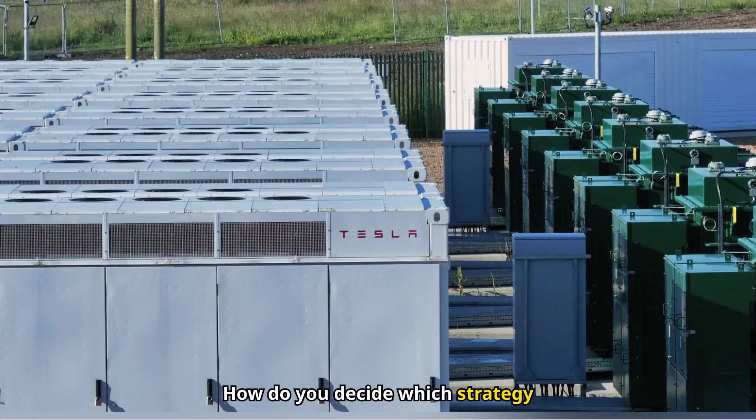AC and DC coupling offers different advantages depending on the type of plant and its environment. How do you decide which strategy is best for your solar or hybrid project? Today we will look at specific cases including new construction, retrofits, microgrids, and regions with grid saturation. Stay to find out which strategy can maximize the efficiency and profitability of your project.

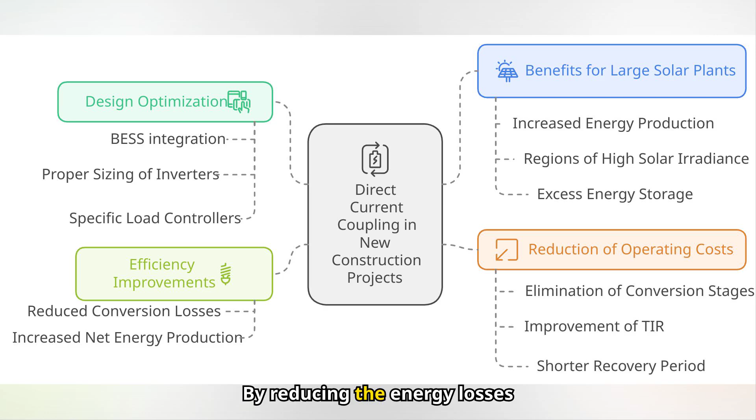DC coupling is a highly efficient solution for solar power projects designed from scratch, as it allows the infrastructure to be optimized from the initial phase. By reducing the energy losses associated with direct current DC to alternating current AC conversions, this approach significantly improves overall system efficiency in new projects, such as large capacity PV plants, greater than 50 megawatts.

DC coupling eliminates the need for multiple conversions, allowing power to flow directly from the solar panels to the storage systems. This results in higher energy efficiency and lower losses during the generation and storage process. This system is especially beneficial in regions with high solar irradiance, such as Andalusia or northern Chile, where energy generation can be maximized and losses minimized. These locations allow optimizing both production and storage, increasing the plant's total yield.

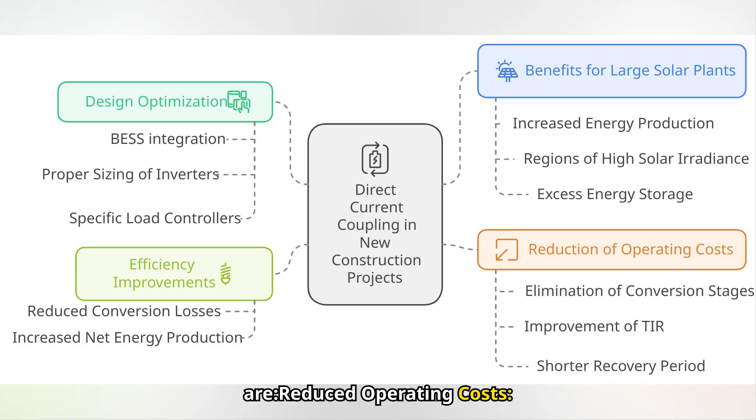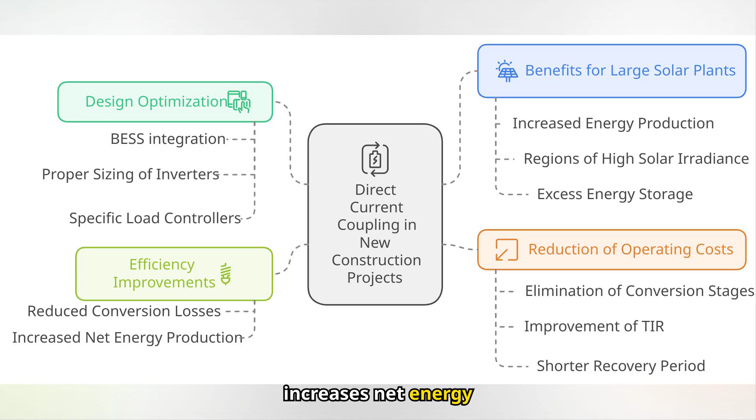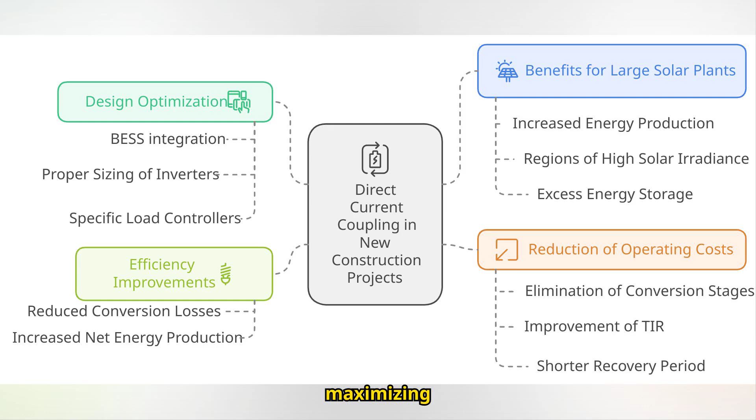The technical and economic benefits are reduced operating costs. Fewer conversions means less equipment, reducing maintenance and operating costs. Increased return on investment, IRR: maximizing energy efficiency increases net energy available for sale, improving revenues. Shorter payback period: increased efficiency and reduced costs allow the investment to be recovered in a shorter period of time. In short, DC coupling is a strategic option for new projects, maximizing efficiency, reducing costs, and accelerating profitability from the start.

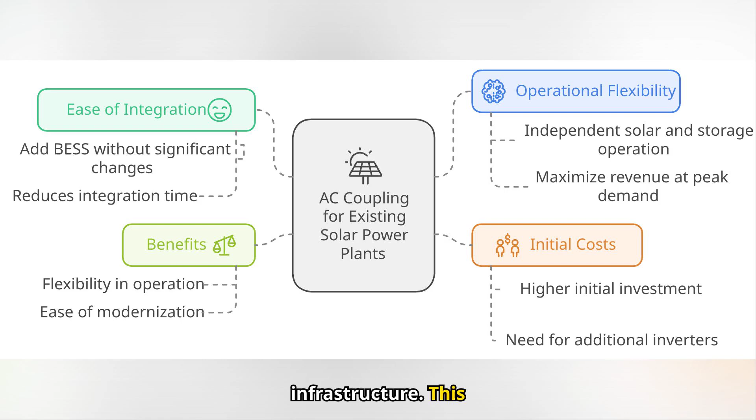AC coupling is an efficient and practical solution for retrofitting solar plants already in operation, allowing the integration of energy storage systems, BESS, without significant modifications to the existing infrastructure. This strategy is especially useful in projects where operational continuity and time optimization are critical factors.

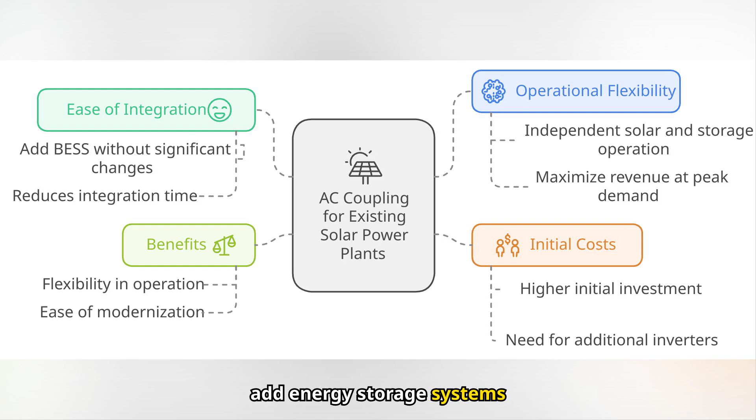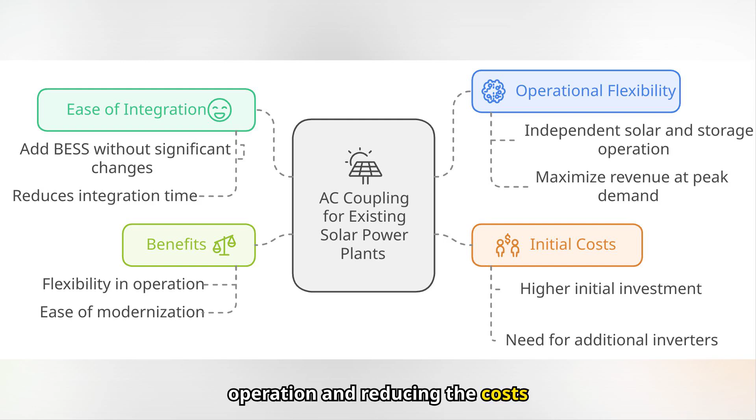One of the main advantages of AC coupling is its ability to add energy storage systems to existing solar plants without intervening in the DC infrastructure. This facilitates fast and efficient integration, minimizing disruptions to plant operation and reducing the costs associated with system reconfiguration.

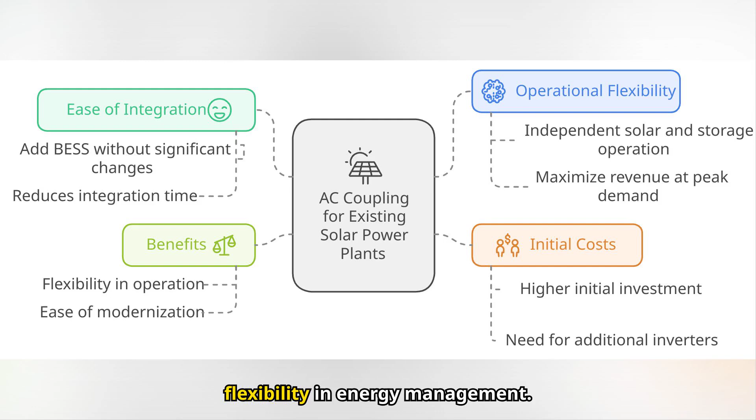Key benefits are independent operation. Both the solar system and the BESS can operate independently, allowing for greater flexibility in energy management. This is especially useful for adjusting generation and storage according to market demand.

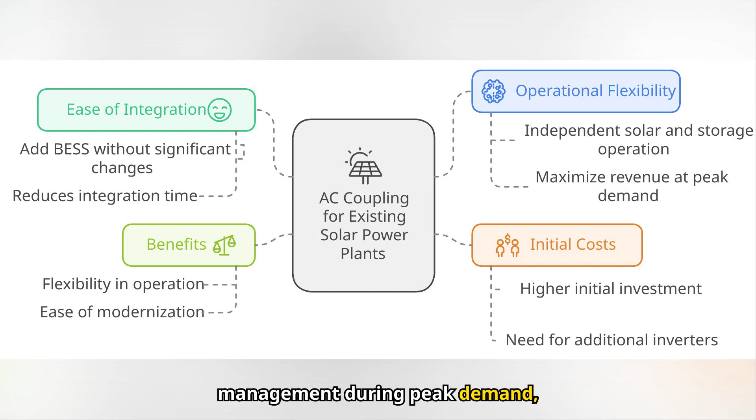Reduced integration times: by not requiring extensive modifications to the DC infrastructure, installation and commissioning times for the storage system are significantly reduced, allowing for fast and effective retrofitting. Increased operational flexibility: AC coupling allows for better energy management during peak demand, storing surplus production for later use when energy prices are higher or demand requires it.

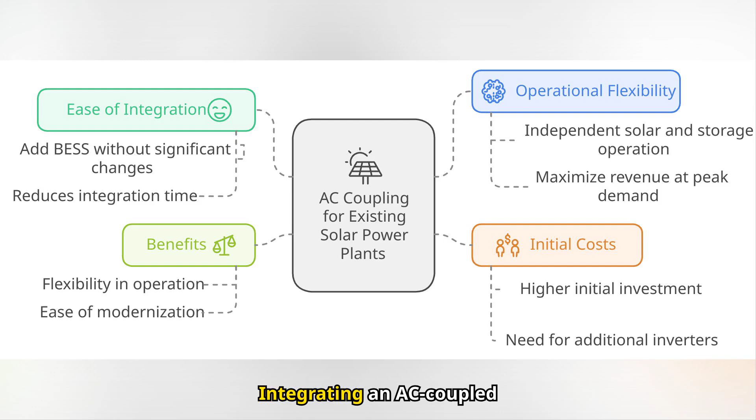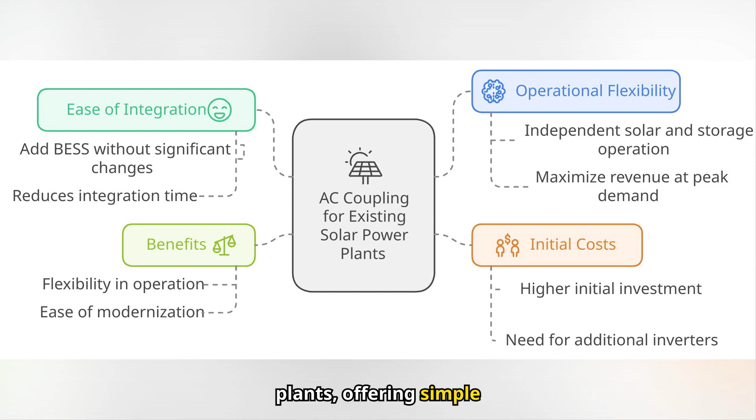A case study is the retrofit of a medium-scale solar plant in a dynamic market like Texas, where price fluctuations are common. Integrating an AC-coupled storage system allows taking advantage of price spikes, maximizing profitability, and improving responsiveness to changes in demand. In summary, AC coupling is an effective strategy for retrofitting existing solar plants, offering simple integration, greater operational flexibility, and rapid adaptation to energy market conditions.

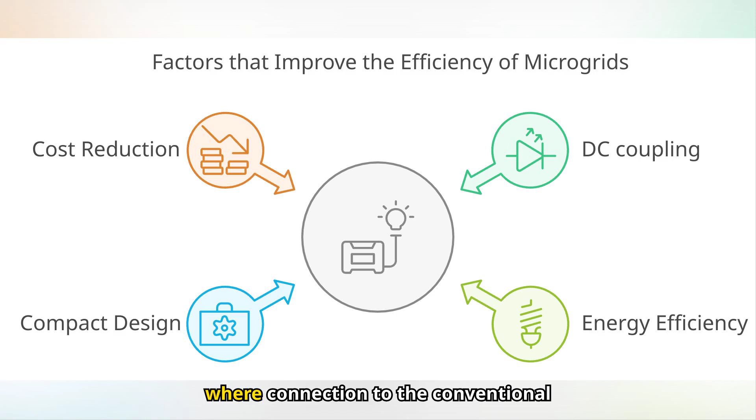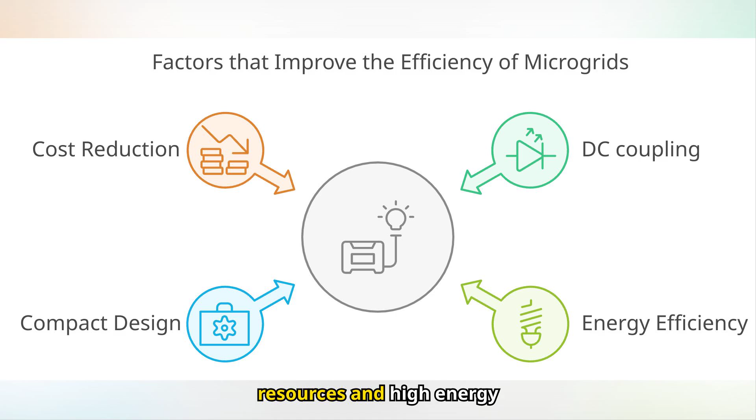Direct current DC coupling is an ideal solution for microgrids and community projects in rural or isolated areas, where connection to the conventional power grid is unfeasible or unreliable. This approach optimizes both the capture and use of renewable energy, maximizing efficiency in environments with limited resources and high energy autonomy needs. In rural or remote communities, DC coupling allows energy generated by renewable sources, such as solar panels, to flow directly to storage and consumption systems, avoiding significant losses in power conversion.

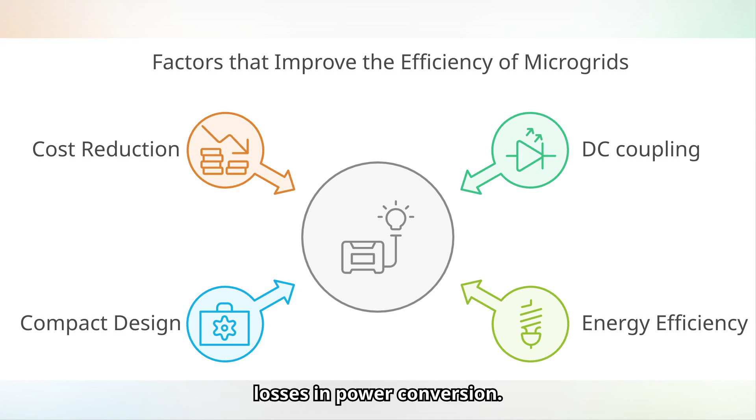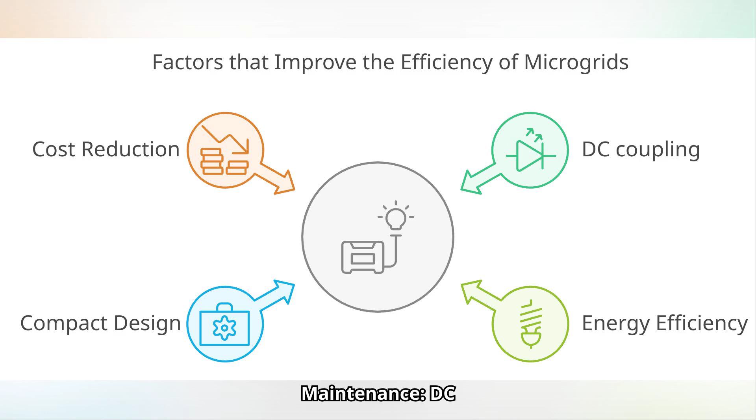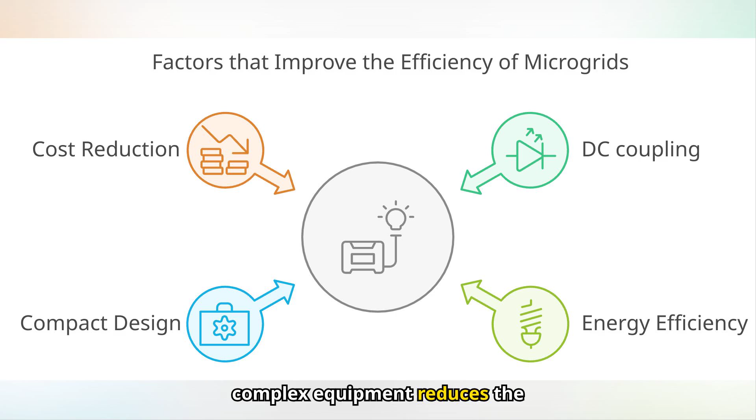This is critical in off-grid projects, where every kilowatt-hour counts to ensure stable and efficient operation. Additional benefits are compact design and simple maintenance. DC coupling systems require fewer electrical components, resulting in a more compact design and simplified installation. In addition, the reduction of moving parts and complex equipment reduces the need for frequent maintenance, which is key in regions where access to technical services is limited.

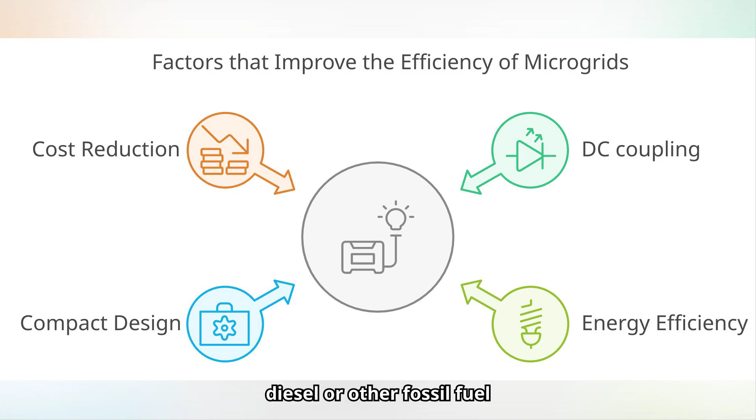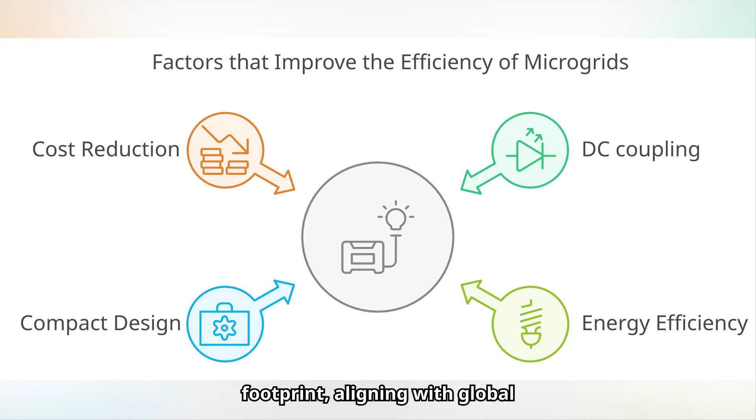Reduced operating costs: by minimizing reliance on diesel or other fossil fuel generators, DC-based microgrids significantly reduce operating costs. This not only improves the economic sustainability of the project, but also contributes to a lower carbon footprint, aligning with global energy transition goals.

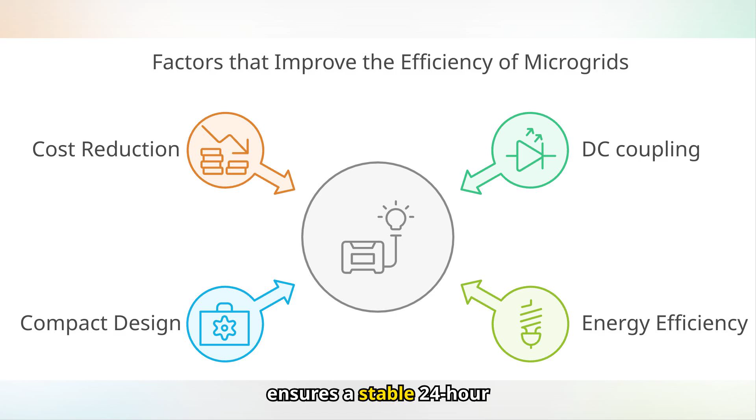An illustrative example is the implementation of a microgrid in a remote community in Africa that combines solar energy with an energy storage system, BESS. This configuration ensures a stable 24-hour power supply, providing continuous access to clean and reliable energy to cover basic needs such as lighting, food refrigeration, and access to communication services.

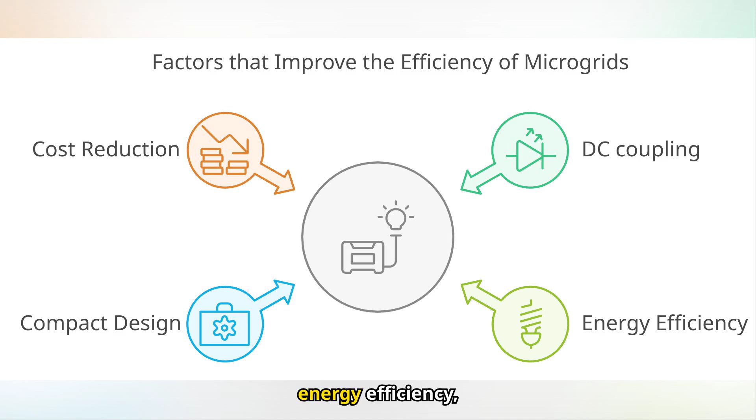In conclusion, DC coupling is a key solution for microgrids and community projects in isolated environments, offering energy efficiency, reduced costs, and an adaptable design that ensures a stable and sustainable power supply.

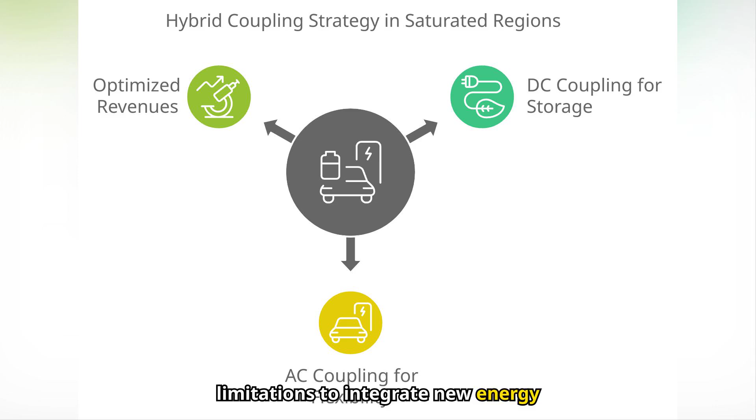In regions where the power grid is saturated or has limitations to integrate new energy sources, a hybrid strategy combining direct current, DC, and alternating current, AC, coupling is positioned as an effective solution. This configuration maximizes the utilization of generated energy, optimizes storage, and improves operational flexibility in complex and congested environments.

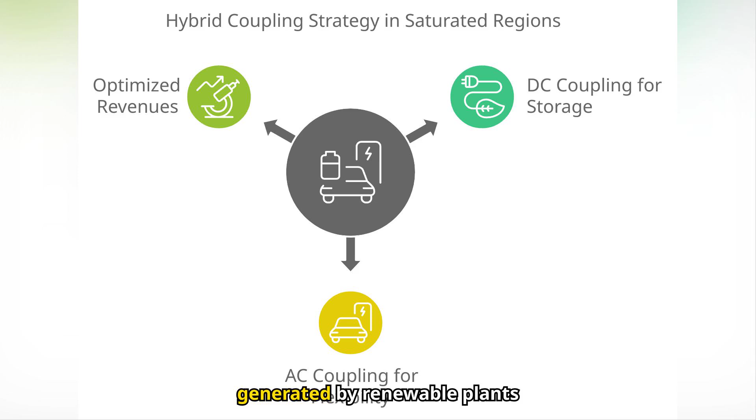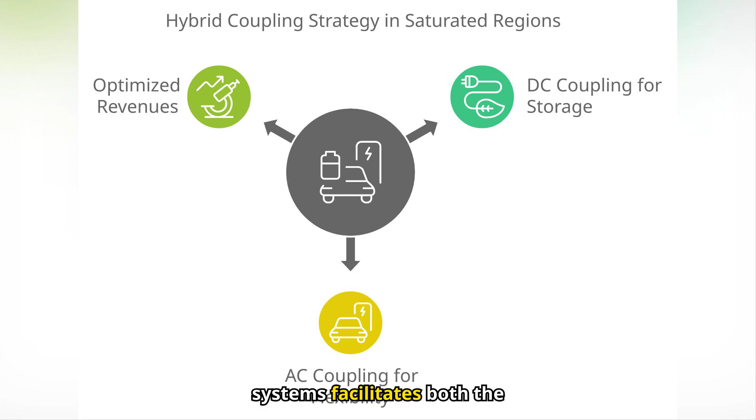When the power grid cannot absorb all the energy generated by renewable plants due to saturation, a hybrid strategy allows efficient management of generation peaks and avoids energy losses. The combination of DC and AC coupling systems facilitates both the storage of surplus energy and participation in grid ancillary services, such as frequency regulation.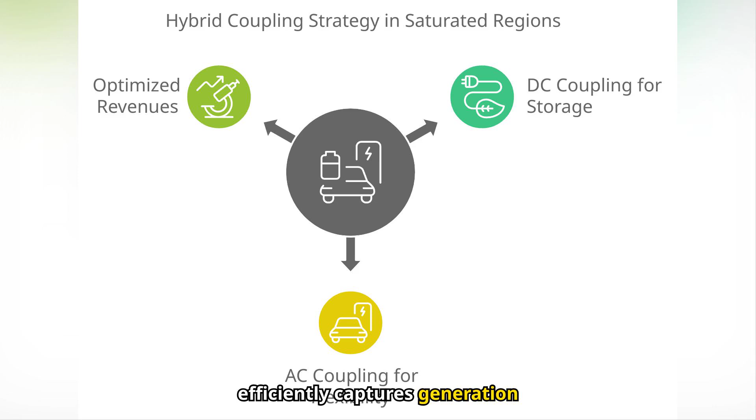The benefits of the combination: DC coupling for surplus storage. The DC coupling system efficiently captures generation peaks that cannot be immediately injected into the grid. These surpluses are stored in batteries, BESS, allowing for later use when demand or prices are more favorable.

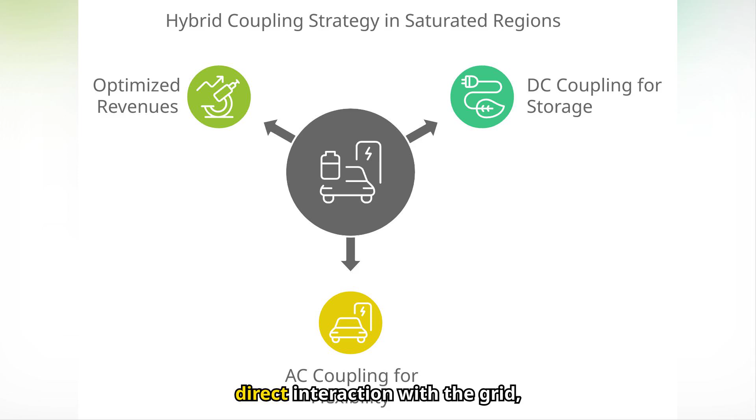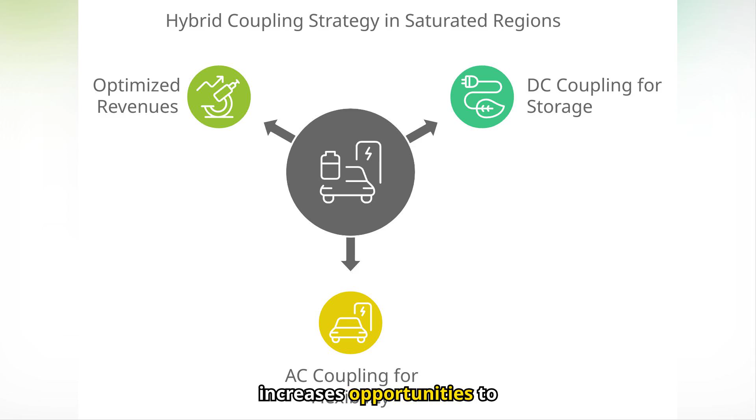AC coupling for operational flexibility. The AC connection allows direct interaction with the grid, facilitating participation in frequency regulation and ancillary services markets. This not only improves the stability of the power system, but also increases opportunities to generate additional revenue.

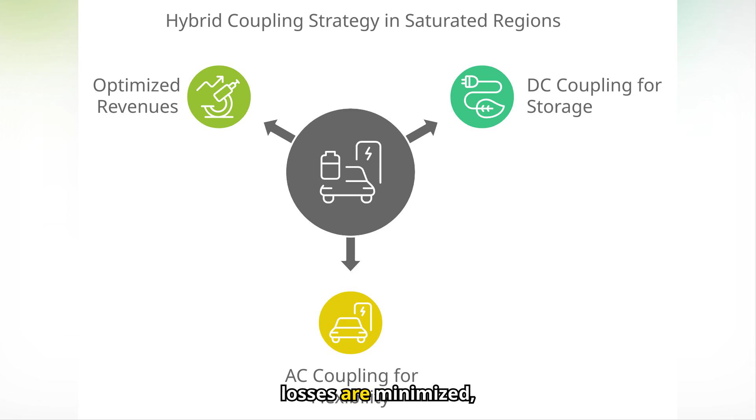Some of the expected results: reduced energy discharge. By storing surplus energy instead of discharging it to the grid, energy losses are minimized, optimizing the use of renewable resources and improving overall system efficiency.

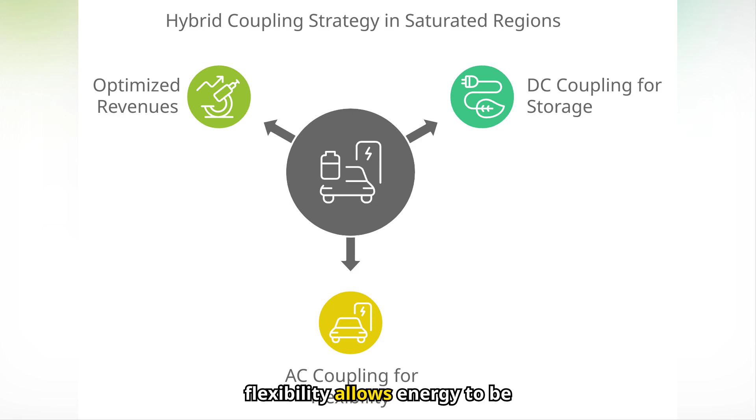Increased revenues: the combination of efficient storage and operational flexibility allows energy to be sold during peak demand, when prices are higher, thus increasing project revenues.

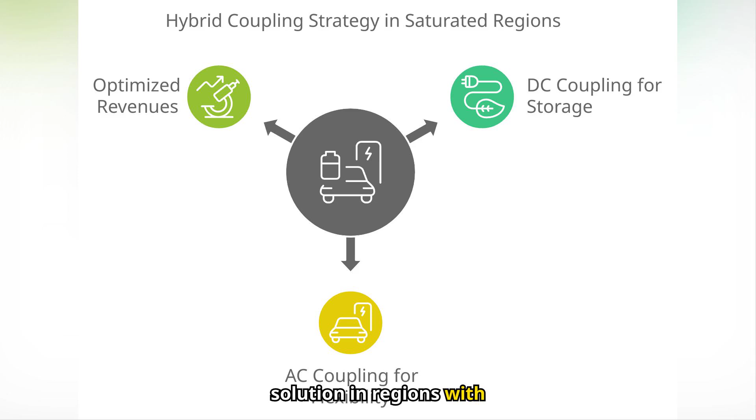In summary, a hybrid AC and DC coupling strategy is a key solution in regions with high grid saturation, allowing for more efficient energy management, better integration of renewables, and maximization of revenues in dynamic markets.

There is no one-size-fits-all solution. Choosing between AC, DC, or a hybrid strategy depends on the type of plant, the environment, and the project objectives. Bottom line: for new construction, DC to maximize efficiency. For existing plants, AC for modernization without major alterations. For microgrids, DC for isolated communities with focus on self-sufficiency. For saturated regions, hybrid to mitigate spills and maximize revenue.